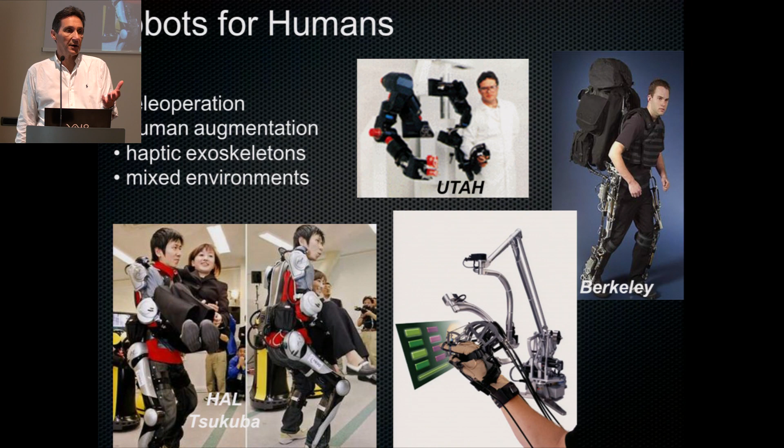So, of course, we are all concerned about doing robots for interaction with humans, that will be applied in cooperative manipulation tasks, domestic applications, domotics, entertainment, assistance, rehabilitation, teleoperation, human augmentation. There are so many applications that require a robot to be in contact with a human. Now, most of us think that this will be the real big market for robotics, the real big driver for robotics in the years to come, and not the old paradigm of industrial robots. So the problem is how to make robots that are soft for interaction, yet strong, simple, but also dexterous, intelligent, and practical.

So the idea that motivates us in the research, the beginning of this community of natural motion, is also linked to studying intelligence, not just mechanics, but also intelligence—a more ambitious program—through its embodiment. That means intelligence is not just brain cells, intelligence is the whole body. So the whole body is the organ of cognition, and we will try to understand how the fact that we have a body and we have constraints due to a body—we have 2 arms and 2 legs, not 3, not 4—but this is a constraint. We have only 5 fingers, not 6. So we have constraints, but those constraints are not just limiting factors of how we are built, our muscle system or our skeleton system. These are not just limitations to our functions. They're indeed defining the way we work. So the intelligence that we have, the way we know it, is the fruit, is the outcome of having this body.

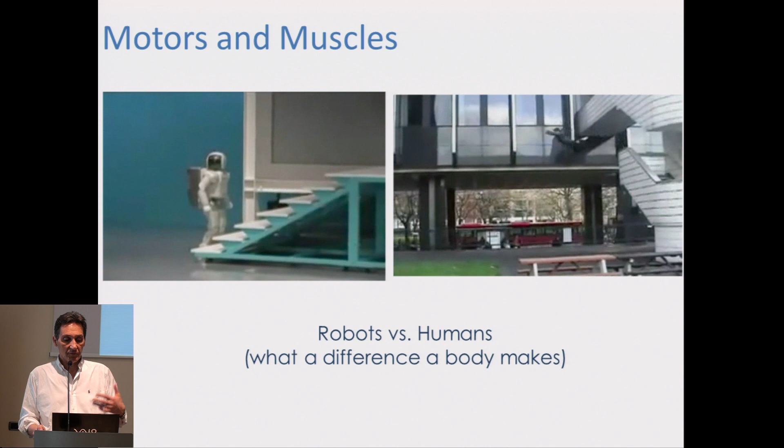Why is that? Well, you've seen this many times, I guess, because the muscles and the body count. What makes a robot very fragile and difficult to use is a weakness that we don't have, because of our muscle system. So what makes a muscle different from a motor?

Motors are accurate and rigid, while motors and gears are brittle. Muscles are resilient — they absorb energy and restitute it, consume little energy, and are capable of smooth, gentle motion, but can also be strong and accurate. So that's the goal.

When you think of machines that interact with humans, the requirements are different. Accuracy might be less demanding, but safety is a must. So the old paradigm that you still learn in most textbooks is: design for accuracy and then try to control for safety.

So you design a machine that is very accurate, therefore it has to be rigid, therefore heavy, and then you try to implement controls, sensors, sensory-based control, to have safety in the interaction with humans — active control to do that.

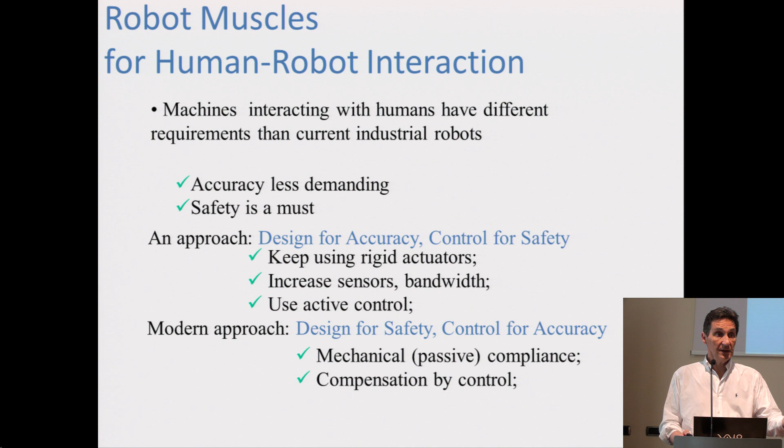But of course, that's not the way we follow. We rather think that we should design for safety and then control for accuracy — compensate flexibility or compliance with control for gaining accuracy again.

You've probably seen this already — I'm not completely sure, since I wasn't here, so I don't know what material has been presented so far. But I'll keep this short. This was early work we did on variable stiffness and soft robots.

Here's an example of how the combination of the link inertia and the rotor inertia, amplified through the square of the gear ratio, can impact a human during motion. Imagine an impact at some velocity, maybe with some compliant covering.

What happens is that safety imposes a limit on the maximum speed, and inertia does too. So you have a curve: if you want to reach some velocity, you have to decrease the inertia, or if you have higher inertia, you have to decrease the speed, in order to have an acceptable level of risk. This is the standard picture.

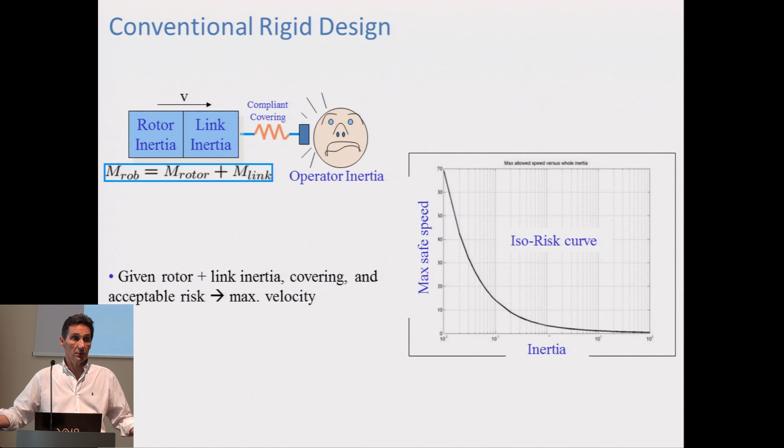This means that if you want to be very safe, you have to reduce the speed — therefore the robot will be very, very slow, which is not acceptable in many applications. So how can you go beyond this limitation? One possibility is to insert compliance between the rotor and the link.

Then you decouple the rotor inertia from the link. This is a big part of the overall inertia because you use the square of the gear ratio. Therefore, it's a big part, and the impact is less if you use this variation.

Now, inserting compliance, fixed compliance, and possibly damping between the motor and the link is sometimes referred to as series elastic actuation. That is a name you probably have seen already.

So if we now try to see what is the minimum time—Giorgio, can you help me with the past part? So the safe brachistochrone has been seen already here? Okay, so we can go quickly through this.

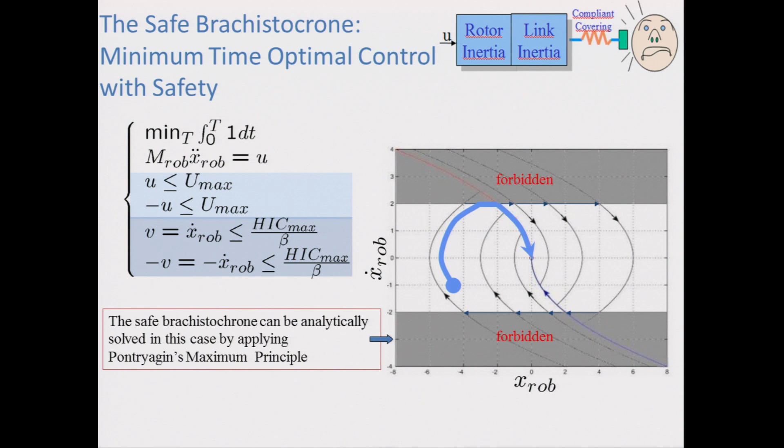So the safe brachistochrone shows that basically you can improve the performance for a given safety limit, but you can do even more if you allow the stiffness to be varied in real time. And therefore you get even higher performance.

So Giorgio, you will be in charge of fast-forwarding me when I'm repeating arguments that they have seen already.

So, motors and muscles. In the human body, each joint is actuated by at least two muscles, and the co-contraction of muscular groups allows for both soft and strong operation of the arms.

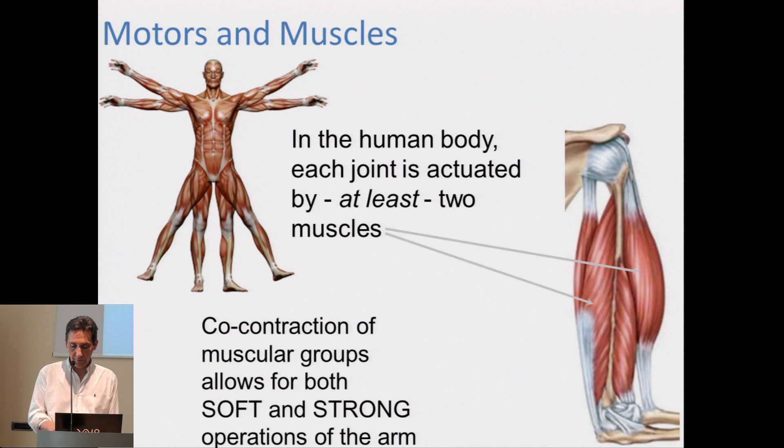Now, what are the motors? I guess you have seen this already: rigid actuation, torque-controlled actuation, series elastic actuators, and then variable stiffness actuators. This is what we are talking about in this school.

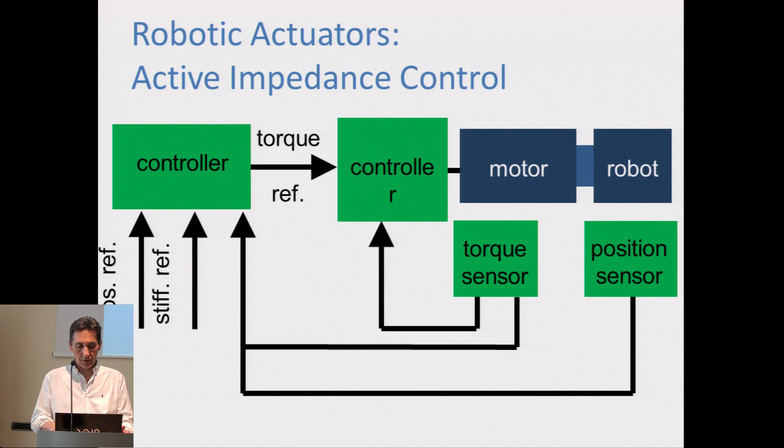I can skip this part because I'm sure that Manolo showed this already. And let me get to...

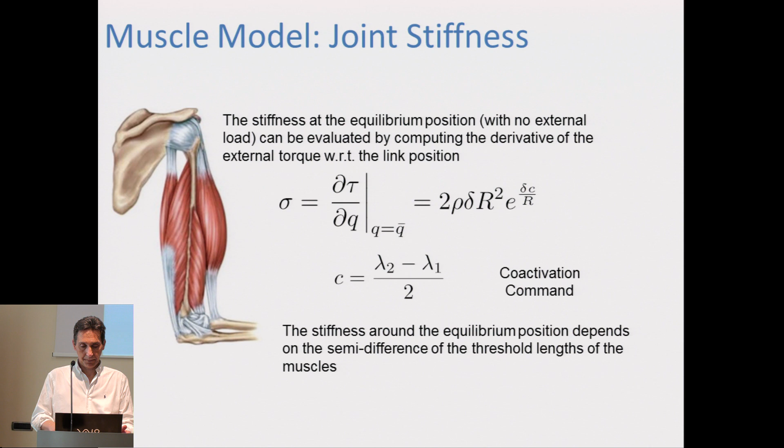So this part of modeling has been seen already, part from Manolo and part from Alessandro. So if there are questions about this part, I'll be happy to go through that again with you.

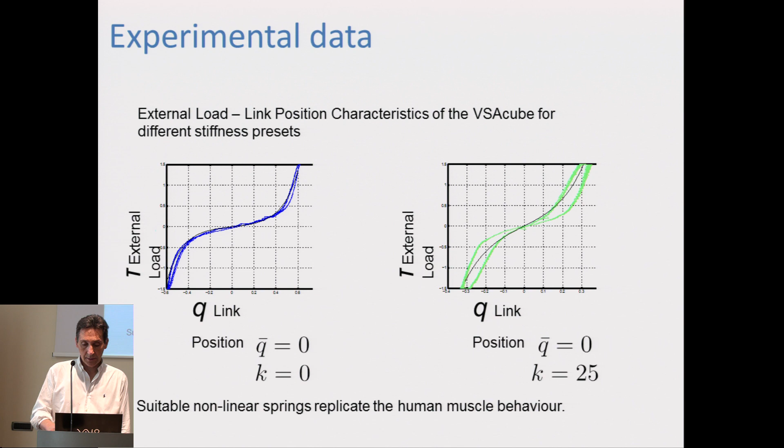So the interesting point here is that with variable stiffness actuators, specifically the cubes that we are using, you can really mimic the behavior of a muscular system, where you replace the R and C commands by the reference position and stiffness reference that you have in the VSA. Even the nonlinear behavior of the muscle can be copied pretty closely by designing these motors.

Okay, so these parts you see. I think I will be... okay, I think Manolo has already given the optimal control part. Yeah, I think I can give you instead. This part, yeah, I think I can.

But what is most important is not even that, because very often the optimal control has to be recomputed in real time, and that is too time demanding. So you will not really do optimal control. What it still gives you is this absolute measure of performance that allows you to compare this hardware with that hardware for an actuator. And that's very important.

Another thing that optimal control gives you is some understanding of how things go. So, for instance, you've seen in the safe brachistochrone that there is this sort of mantra: stiff and slow, fast and soft. That comes from optimal control. You see that the stiffness and velocity switch, the switching function is opposite. So in most optimal trajectories, you want to be soft when you're fast.

Now, the exact switching times have to be solved numerically in most cases. So this might not be possible to do in real time when you really move the robot and have an unknown situation and say, let's compute the safe brachistochrone. It might take too long to do that. But you know that a good motion will almost always combine soft and fast, stiff and slow, and similarly for the other policies. So you distill some lessons out of optimal control, more than just taking the exact trajectory in some cases.

And finally, there is the third great advantage of optimal control, and the reason why in the school we have insisted a little bit on this, is that it represents a language by which you can dialogue between natural and artificial systems. This is what we call bio-aware robotics. When we do robotics, we have to know what happens in the natural system, not always to copy, not always to mimic, not always to be inspired, but to know, and compare, maybe to make a different solution, but to know how it works.

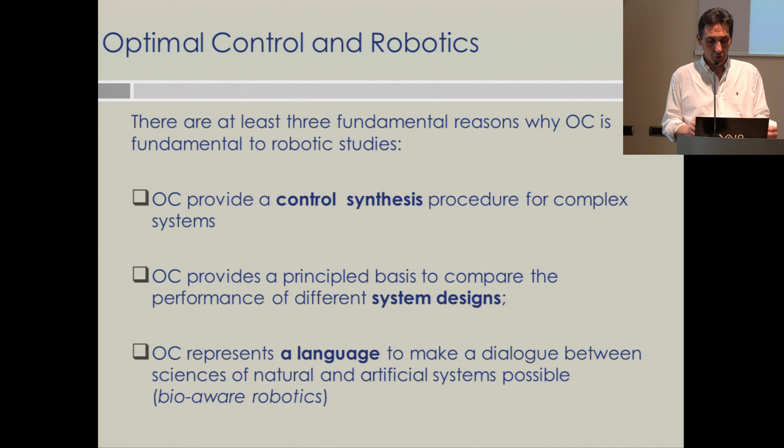Why is this important? Let me show. Because when you want to do an abstraction, the embodied intelligence philosophy means that a large part of the functional capabilities of an organ are in the physical characteristics. So what do I mean? I want to learn something from a human, right? And then I observe how the human does something.

The way a human moves is made by his embodied intelligence, depending on the hardware of the human, the muscles and the skeleton and everything else. So if I simply copy the human motion in a robot, I violate the fundamental tenet of embodied intelligence, because the robot body is different from the human body. If I do exactly the same thing that the human does, I make a big mistake. Humans do the way they do because they have that body, and my robot will never have the same body. It's metal, it can approximate, can look like, we can make efforts to, but it's not the same.

So you shouldn't just work at the level of one-to-one mapping by copying what the human does, but you have to abstract, to understand, go to an upper level, understand what's the philosophy, and then apply the same philosophy to the robot. I think this is the correct approach. You have to abstract from nature, understand, and then bring it back to robots. Optimal control seems exactly the tool that you need to do this very often, because it is an abstraction that does this.

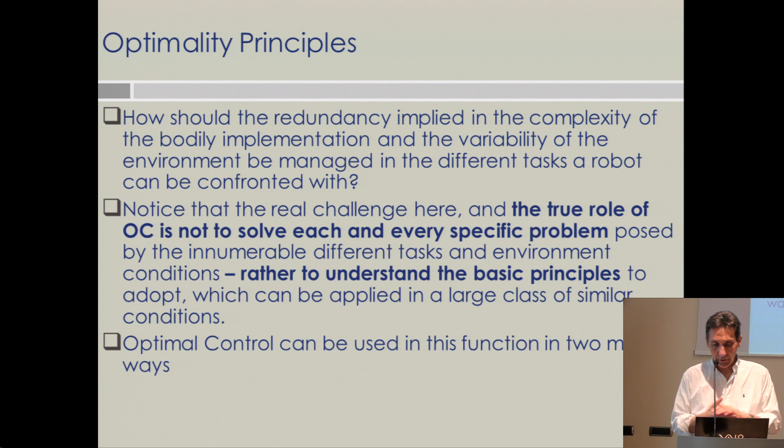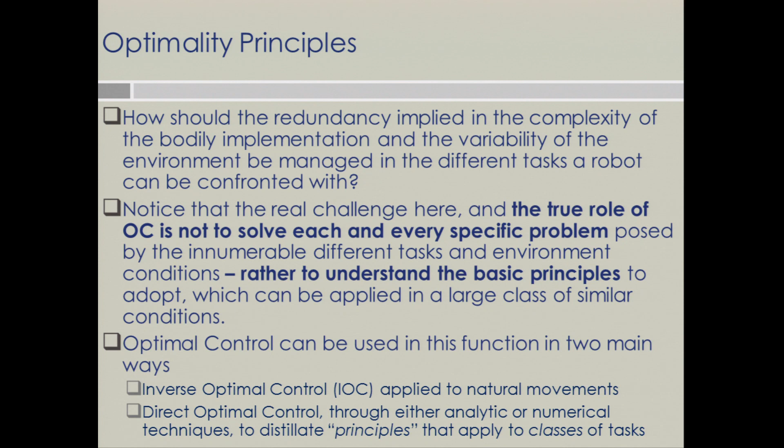Again, optimal control is not, in my opinion, meant to solve each and every specific problem, but to try to understand. There are two main ways to use optimal control: one is inverse optimal control, applied to natural movements, and one is direct optimal control, through either analytical or numerical techniques, to distill principles that apply to classes of tasks.

Let me give you examples of this, some of them from the literature. This is a paper by Mombaur, Laumond, and others in 2010. They show that a stereotype of locomotor trajectories could be interpreted as the result of application of an optimization index.

So what was the experiment? They asked, Alain Berthoz was also involved, they asked the person to move and go through a door in the room, starting from many different positions. Let me mimic it here. So, I'm here, the door is there. I walk, and I go here. Then later on, I might be somewhere else, I might be here, and the door is there, and I do this. So they took all this data.

Notice that when I want to go there, I don't do this - there are infinite paths that I can take, but there is a pattern in what normally humans do. So what Mombaur and others did in this paper is try to understand what the human is doing when it moves in an environment. And of course, they got all this data. The point now is how you understand this data.

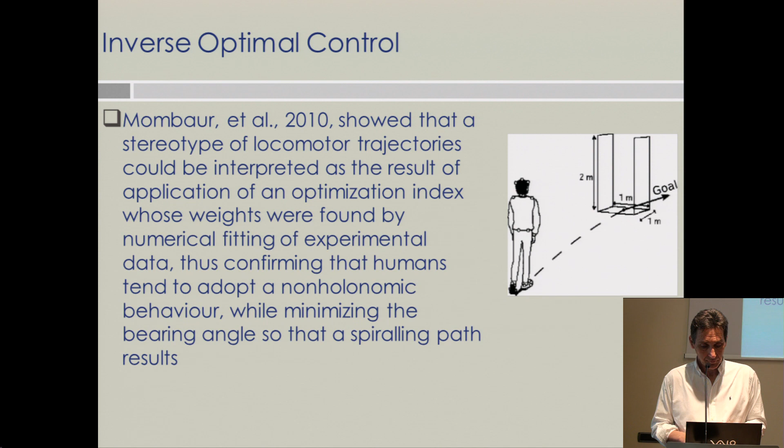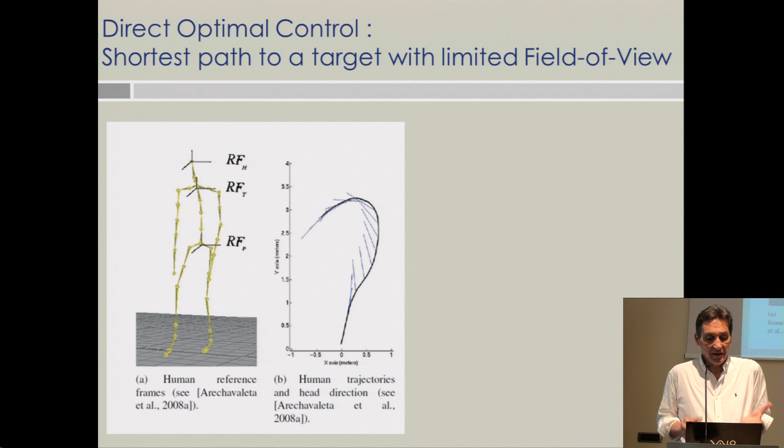And this is an example of direct optimal control. From the inverse optimal control that I explained before, we are now moving to direct optimal control. Now we are asking: I have a model, I have this vehicle that can move in the plane, has some non-holonomic constraints, and has limits. What is the best path to go, shortest or fastest, without missing the object? Direct optimal control means you write the performance index, you have the dynamics, you do your math. Basically you apply Pontryagin, you do the analysis, you do the synthesis, or if the problem is too hard, you do numerical control. And you find solutions.

Here is one solution. In this case, we were pretty lucky because we could find the analytical solution to this optimal path. It's interesting to see that the optimal path is made of concatenations of arcs, optimal arcs or extremals, that are either straight lines or arcs of a logarithmic spiral.

So the optimal paths are either straight, if you have the object in front of you, you just go, or if it is not directly there, then what you do is keep the target at the extreme of your field of view and move towards the target. If you do this, the trajectory that results from this extremal is a logarithmic spiral arc. So you see those spiral arcs here that take the vehicle in shortest time to the goal. Here is the goal.

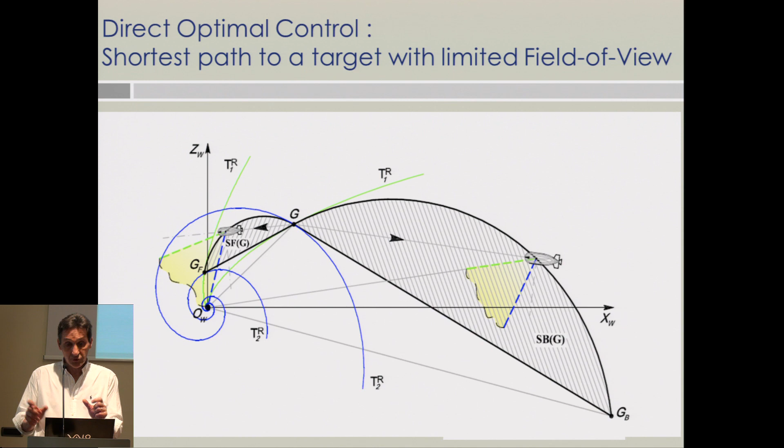Also, a raptor has to fly, and when you fly, you cannot move sideways. You have to turn or go straight by flying. So you have non-holonomic constraints. And raptors have a limited field of view—indeed, they have a pretty narrow field of view. Of course they could turn their head, but when they are catching prey, they won't turn the head because the air drag would be too high. So they want to keep the most aerodynamic configuration, so the head will be fixed.

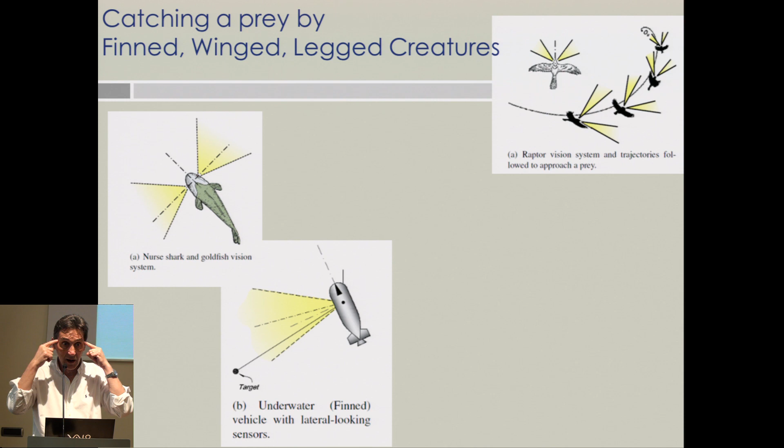So they have a very narrow field of view, and they have to keep the prey in view while they fly. They cannot take the prey in front of them because they don't see in front of them, right, because their eyes are on the side. So raptors have to fly looking at the prey that is on their side.

Even butterflies or moths fly according to the same principle when they go around a light bulb. It was very interesting that after having solved this direct optimal control problem with logarithmic spirals, you go into the natural literature and find that sharks, falcons, and moths all fly along logarithmic spirals. These are natural data, biometric data from all those species, so they all do the same thing. This is what I mean by saying that optimal control is an abstraction that can help you take real inspiration from nature.

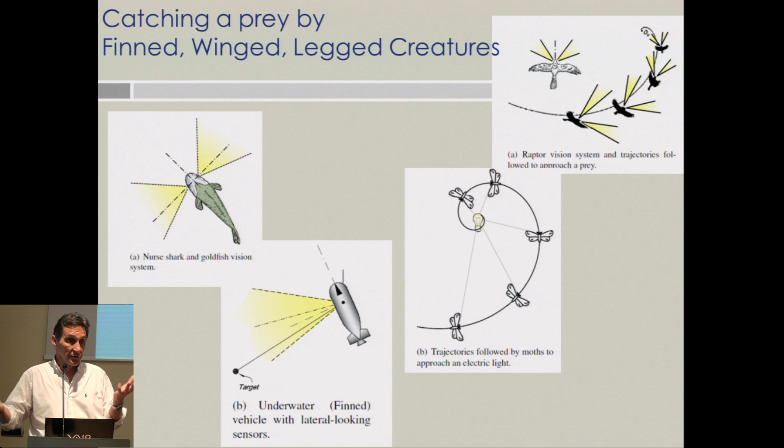Okay, with this, I think I will skip some parts because you have seen this already, on the actual application of optimal control to variable stiffness motors. So I have given the introduction to the optimal control part after the optimal control part. I hope you still... Oops, big mistake.

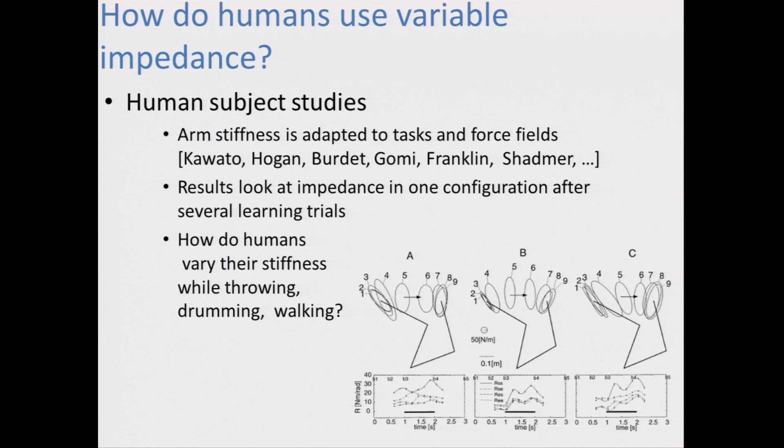Okay, so we say we have variable impedance. How do we use it? One possibility is optimal control, enough with that. Another possibility: how do humans use variable impedance? Try to understand what they do and do it again. So one obvious thing to do, first of all, is to try and understand how humans do that by doing human studies.

We know that arm stiffness is adapted to tasks and force fields. There is a lot of work by Neville Hogan, Mitsuo Kawato, and then Etienne Burdet, Gomi, Franklin, Shadmehr, many others who looked at the impedance of the arm in different motions.

As I said before, it's not easy to measure stiffness. It is possible during a repetitive task, like what Etienne Burdet did. But if you wanted to know what the stiffness is while I throw an object, how does the stiffness change while I throw the object? I don't think anybody is able today of giving you an answer. We don't really know, because it's too fast to be measured. So this is not easy, we don't really know how to do that well enough yet.

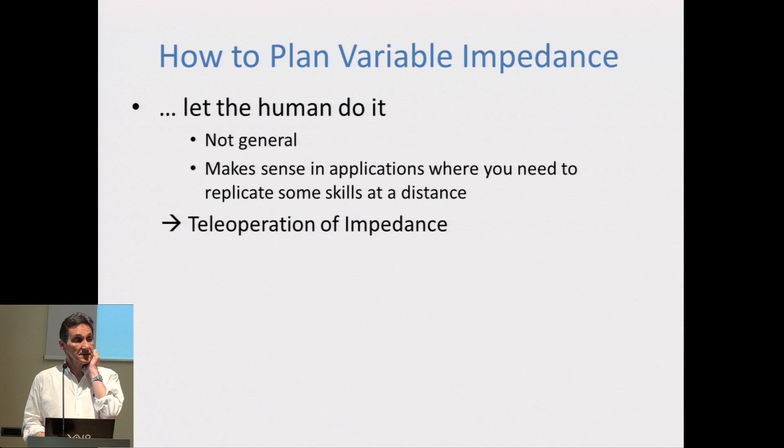So you know what teleoperation is about. Teleoperation consists of measuring motor control parameters in a human and replicating them in robots. The typical application is that I have a master and I have a slave. My left arm is my slave, so I move the master and the slave follows. Teleoperation is very old, older than robotics. The very first mechanical arms designed in the 50s or even the 40s were arms for teleoperation, much before robots, especially for nuclear waste disposal or nuclear manipulation.

Remote control of position is rather easy, you just measure one position and you copy it in the controller. And here is an example. But position control is not enough when the slave interacts with an environment. You move the master and the slave, and then you want to do something on the environment. I mean, as long as the slave is free, there's no problem.

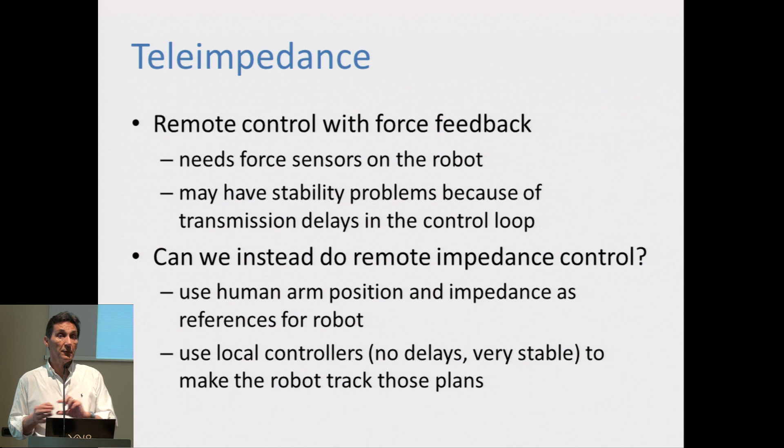When the human arm is soft, the robot should be soft. And when the human arm is stiff, the robot should be stiff. And when I'm stiff in one direction and soft in the other direction, I want the robot to be stiff in that direction and soft in the other. By doing this, I hope I can get away without controlling the force, just sending a reference, pure feed-forward control of impedance.

So the idea is that the operator moves the hand and adapts his impedance to solve the task based on visual information from the scene. So we have to sense the position and impedance on the master, control them on the slave, and then ask, is this useful or not?

How do we measure impedance? One way of measuring impedance, probably the simplest and most accurate, is electromyography. Electromyographic signals correspond to muscle activation and are strongly correlated with muscle force. It's very easy to implement, not invasive, relatively cheap, much cheaper than exoskeletons. It's a common signal of choice for prosthesis, for instance.

The signals are not perfect, they're noisy, they're not too stable, so you need some good processing. But there is quite some work on measuring joint torque and stiffness estimation from EMG. You can do that using a model of the arm, which is not trivial, because going from the forces measured at the muscles to the torques at the joint is a long way — you have joints that are not really kinematic joints, they're all rolling joints, and tendons that don't have a fixed radius but change in motion. So the model is complicated.

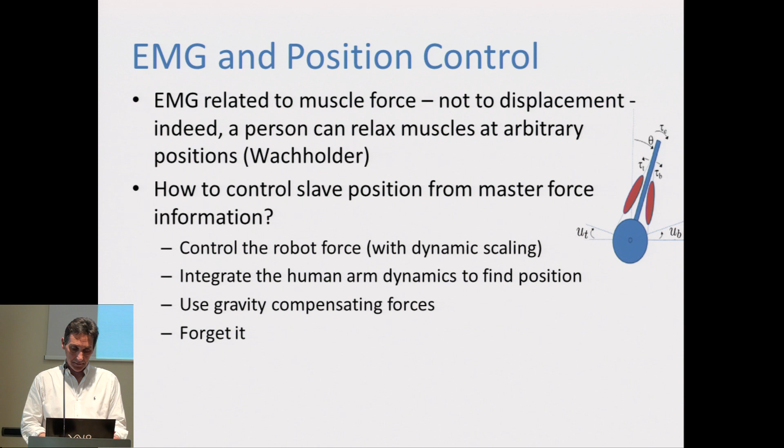So to measure the position from the master to the robot, I don't think it's a very good idea to use EMG, because there are many other means of measuring position, such as optical or inertial measurement units. So the idea is to control the robot force. Well, this is the idea that I don't like. You could control the robot force, integrate the human arm dynamics to find position, using gravity compensating forces, and then forget it. This is too long away. Measuring the force to find a position, it never worked with us.

But then, as I said, just measure the position. There are very cheap inertial measurement units or more accurate optical measurement units. So we measure the master directly, and we control the position through those sensors with higher priority, and then we control impedance in the null space of position control inputs. So basically, we now control the position of the slave and control the impedance of the slave without altering the position command.

So we can vary the slave control in the null space. That means all the controls that will not change the position. We use those controls to change the stiffness.

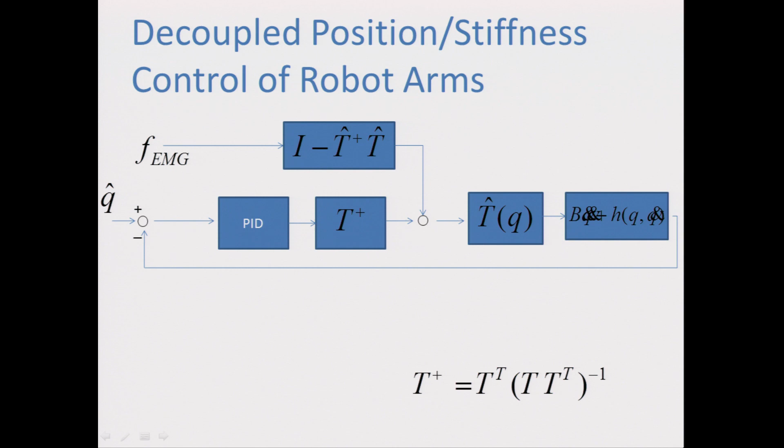So this is the scheme that we are using. Again, T is the map from EMG to torques. What we do is take a measurement from the EMG directly, and project them in the null space of this map T. That means you get torques that will not affect the position. And here you have the position control loop that gives you the torques needed to get some positions. You add something that filters out the component for actuation. So the torques in the arm are divided into subspaces: one controls the accelerations and positions, and one doesn't change that, only changes the stiffness because of the co-contraction.

Here is the setup. You can put EMGs on the muscles, measure them, get the position commands from markers, and get the co-contraction and stiffness from here. Put them into a controller, and then use them.

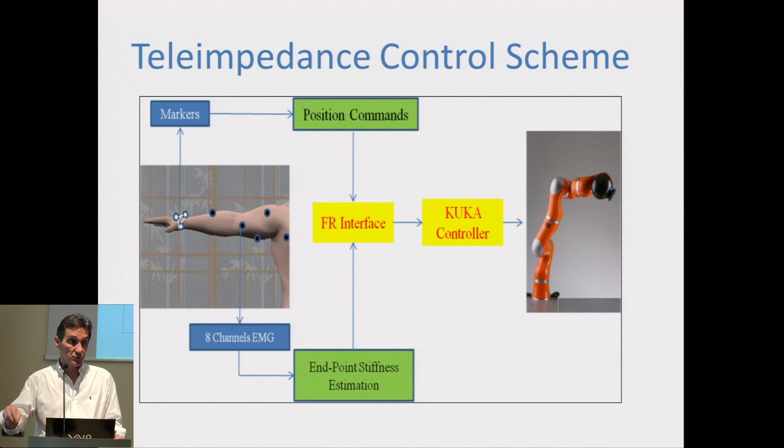First of all, we use that in a KUKA arm. In the KUKA arm, we are controlling the impedance through force control, through the classical impedance control implemented in the KUKA. But you can do the same, and we did, with variable stiffness actuators, where you have the control of the stiffness directly at the physical level.

Here are some experiments. On the right you see the arm of Arash Ajoudani doing this very simple task, moving the arm. You get the position from these sensors on the wrist, and the robot is following that. At the beginning, it moves with very little stiffness, so the robot tracks with very little gain on that position. At a certain point at the end, the person stiffens up the muscle, the arm. Then the robot gets the same impedance, so its position gains are basically increased, and it will press more.

So observe this again. At the beginning, he's relaxed, he's moving. You see the robot has an environment like a sponge, enough to keep him away from the reference. But when he stiffens up, then the robot also stiffens up and gets over the obstacle. Is that clear? So it's a very, very simple idea, actually. Embarrassingly simple, but effective. Let me see if I have the videos here.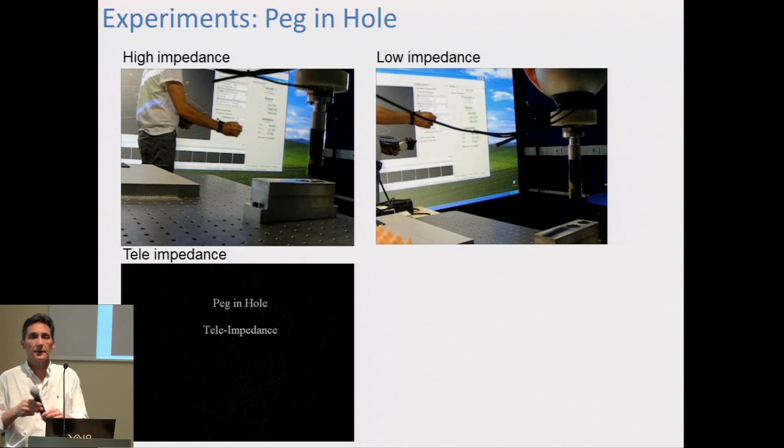Yeah, so here is a classical peg-in-hole example. Roboticists have always been obsessed with this peg-in-hole thing, I don't really know why. So you have a hole and a peg. The hole is tight, and you have to put the peg into the hole. If you make a little error in alignment, you will have very high forces. It will jam in the hole and will not go down. If you are in the hole, you have to press with some definite force in the vertical direction, but you have to be careful not to go in the wrong direction with torques or displacements.

So basically, you have to be compliant in this direction and strong and stiff in the vertical direction. So there are directions where you want to be stiff and directions where you want to be soft.

So what happens if you do teleoperation without teleimpedance, and you have the arm controlled with high impedance? As you see here, Arash is moving the arm, getting to the point where the robot touches, and then you have this interaction. This interaction has very high forces that you could see from the screen if it were not so small.

So you have high interaction forces. Here is with low impedance. What happens with low impedance is that, to all effects, you cannot get into the hole. If you have low impedance, you can find the hole because you adapt much better, but then you cannot press inside.

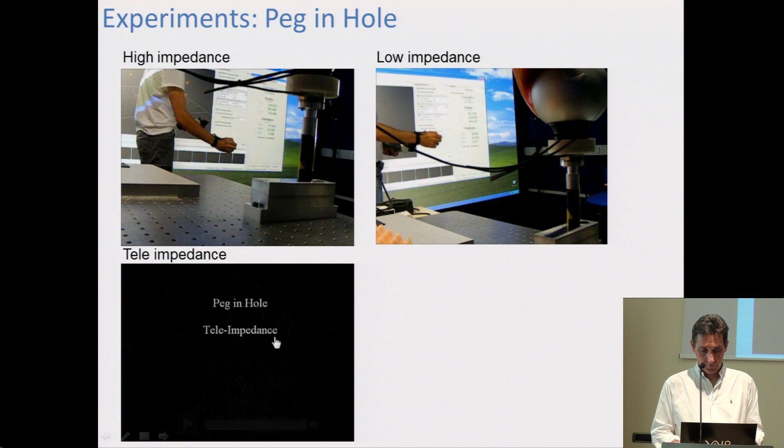And finally, here is the teleimpedance. I hope you can see this. So here, the human is moving around. He's relaxed now. He touches the environment. He's very relaxed, so forces are very low. You're not controlling the force, but you are controlling the impedance, so the arm is very soft. And then when you get to the hole, you force it down. So you squeeze, you co-contract your muscles, and you go down.

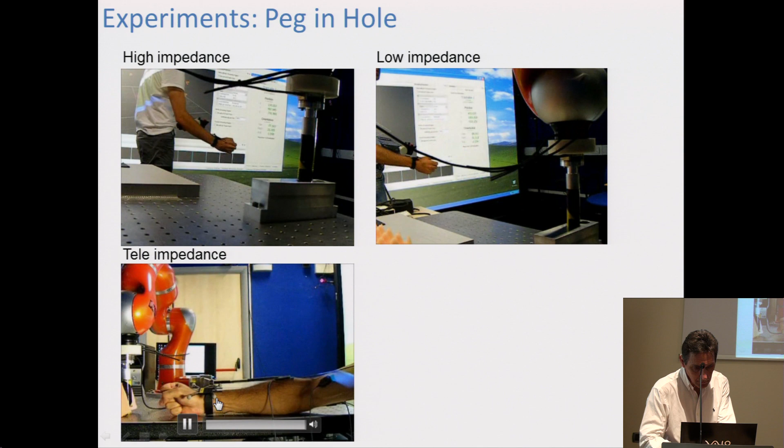When you are inside, as you could see here, let me show the final part of this again. Was this the peg-in-hole? Yeah. In the final part, you will see that it goes, then it co-contracts to press the peg inside, and then

he relaxes. And when he relaxes, he moves the arm up, but the robot will not come because there is a high force. The hole is very tight. So to get the peg out of the hole, the operator has to contract again.

What is notable is that, of course, this goes through a calibration of the EMGs that, as we said before, you need to know this T matrix, this mapping, and you have to calibrate that experimentally. Turns out to be pretty robust. So I used it with the same calibration data as Arash.

Now, between Arash's arm and my arm, there is a big difference. He plays tennis almost professionally. I'm absolutely not that good. So he has twice the arm that I have. And still it worked with the same data.

And what was remarkable when I tried it is that it's really convincing. You feel like you feel the force. And when you extract it, it seems to you that you are really feeling the effect of the disengagement from the hole.

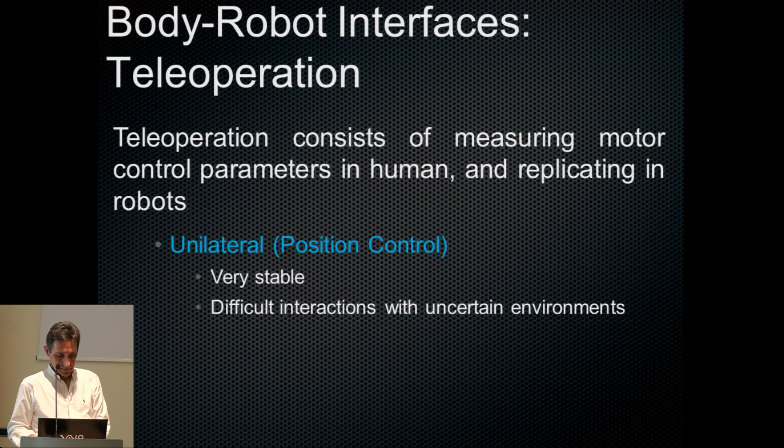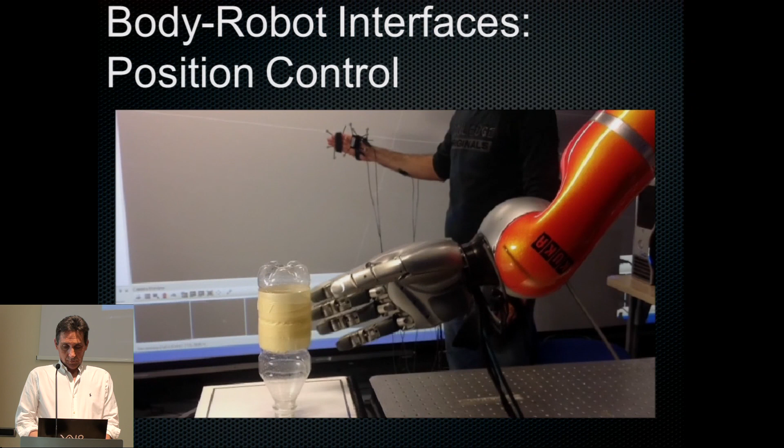Okay, I think we can go quickly through this because we have seen this already. And these are some details on how you model the stiffness and how you practically estimate those mappings, but I think these are a little bit too much detail. So next part.

So this concludes the first part of the talk, and then I move to the second part. And the next part is on hands, again using an embodied intelligence approach to taming the complexity of hands. Again, a big group worked on this.

Yes? Before we start with the next part. So, okay, yes.

For my understanding, the most complicated part is that mapping, so finding matrix T. And how robust is that matrix? Because you said that for different subjects, I suppose it's very different. From the very beginning, you have to measure EMG, which is very noisy, but also you have to calculate stiffness. And even for the same subject, when your skin gets wet, I believe that these measurements are very different.

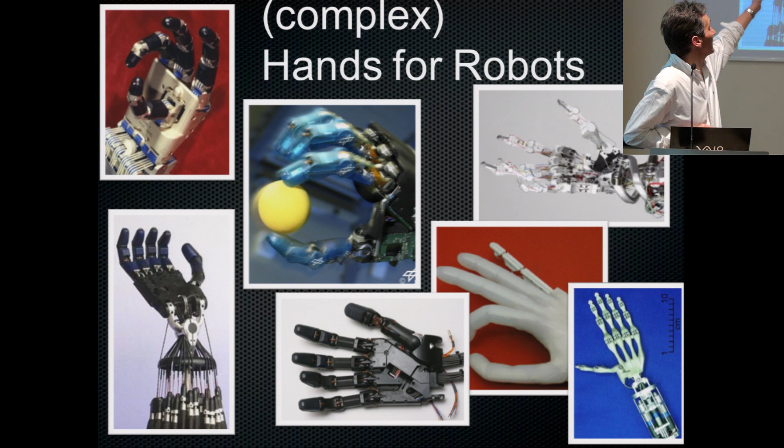Hands for robots are something very interesting to many people, and to myself, since my undergrad thesis work. These are beautiful hands that have been around, some from the 70s, some very recent. There are many beautiful engineering pieces. It's a long history of hands.

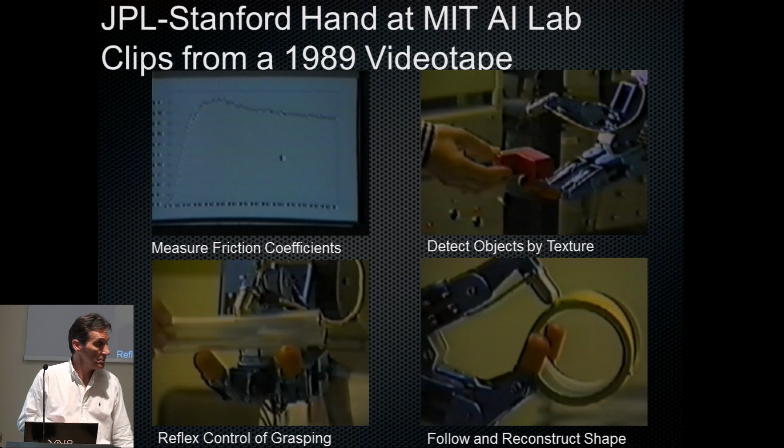This clip is from 1989, showing the JPL Stanford hand, also called the Salisbury hand. With this hand and a very simple intrinsic tactile sensor on the fingertip, a force-torque based sensor, you could do things like measuring the friction coefficient on an object, sliding the fingertip, detecting different objects by texture simply by sliding the finger, having a reflex control of grasping to grasp an object with minimum necessary force, and when the object tends to slip, increasing the force just to oppose the slippage, or following and reconstructing the shape with tactile exploration. These are things that are still interesting now, I think, and they were done back in '89.

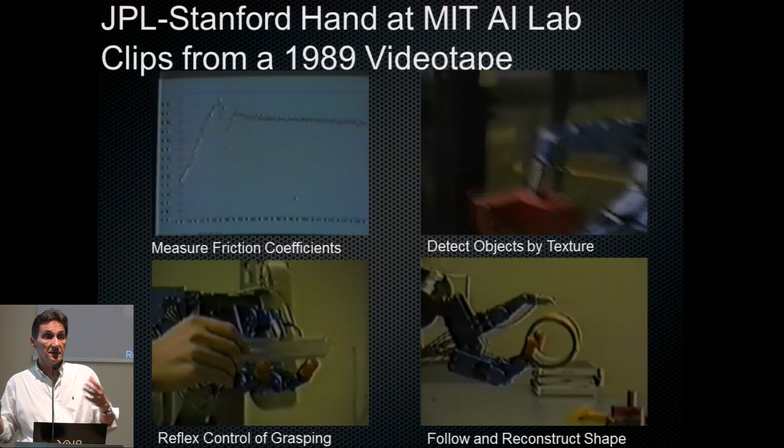So why should we bother about robot hands? Aren't they a solved problem? There's a famous quote by Gill Pratt, the DARPA main person, who said grasping is solved. That attracted the rage of the whole community, because you cannot say a problem is solved until people stop working on it. But he was right.

In some sense he was right, because hands have been around doing things for a long time. So what's the problem with this hand? If you look at the back of it, there are at least a couple of problems. The hand is nice and almost the same size as a human, roughly, but it has a big motor box, connected to the hand by Bowden cables, sheaths and tendons, which were a source of friction and, most importantly, a source of very frequent breaks, especially at night, especially when you needed them for a demo the next day.

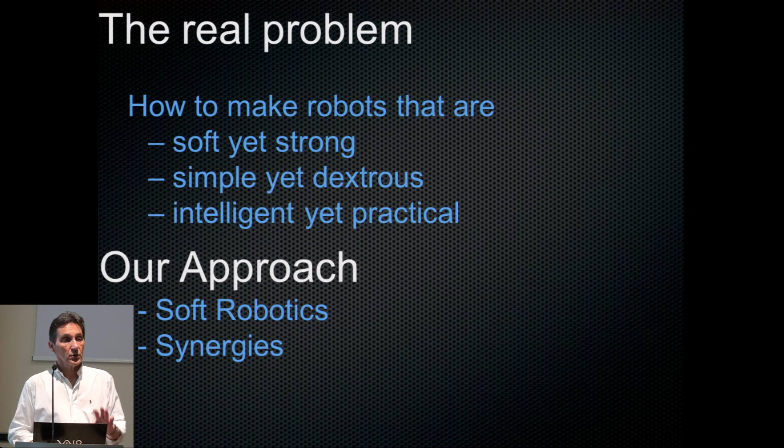So this is terrible. The real problem with hands is to make robots that are soft yet strong, simple and dexterous, intelligent but also practical. The approach we followed merges two ideas: one is soft robotics, which is what you've been seeing here, and the other is synergies, which I referred to quickly at the beginning. So I'll tell you a little more about synergies now, part of this natural machine motion idea.

The human hand is itself a very complex system. As you know, there are veins, arteries, bones, ligaments, muscles, and the sheer numbers are striking: 29 major joints, 123 ligaments, 34 muscles at least to move the hand, 48 nerves, and an incredible number of tactile receptors, thousands, in the skin of the hand. How can the brain cope with that? How can the brain use the hand while thinking, while talking, while doing other things?

There is some evidence in neuroscience for what are called sensory motor synergies and constraints. There's a long history of people observing that the brain doesn't really know about muscles, as Bernstein put it. When the brain wants to do something, it doesn't talk to a muscle directly. It talks to a higher level of organization called a synergy.

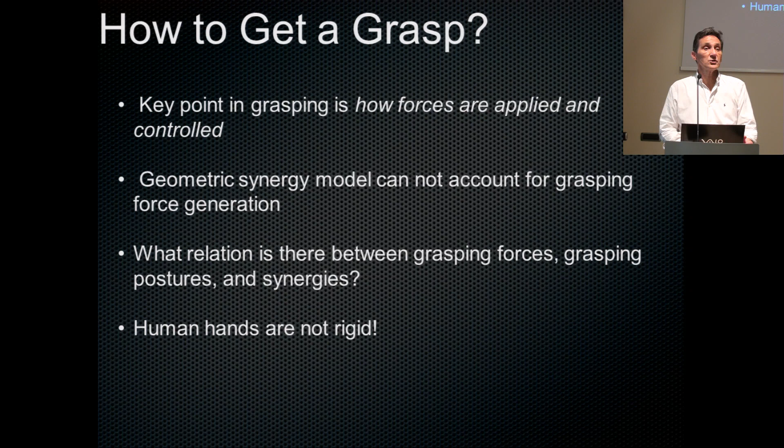The solution is that humans are not rigid, and so shouldn't be machines. If you introduce a model of compliance in the human, you have compliance due to contact compliance, and some compliance due to the tendon system, the muscle system, the capsule. So you have compliance in the system, represented here through this formula.

Basically, you have some compliance at the fingertip, due in part to the object compliance itself, due in part to the fingertip compliance of your arm. Then you have some compliance at the joints or at the motors. So joint compliance is CQ, structural compliance at the contact is CS, CQ gets transformed through the Jacobian of the finger, you sum the compliances, then you invert, and you have the stiffness matrix of the grasp.

If you introduce compliance, then you can talk about forces. If you don't have compliance, you will have a hyperstatic system and a force-indeterminate system, and you cannot really know what is going on with forces. So since humans are not rigid, we introduce a model of compliance.

And then you can talk about the internal force, the control of internal forces. Internal forces, if you haven't been working in grasping hands, maybe you don't know, but internal forces are the crucial part of hand control and grasp control. Internal forces are those forces that a hand can apply on an object without moving the object. They're also called squeezing forces.

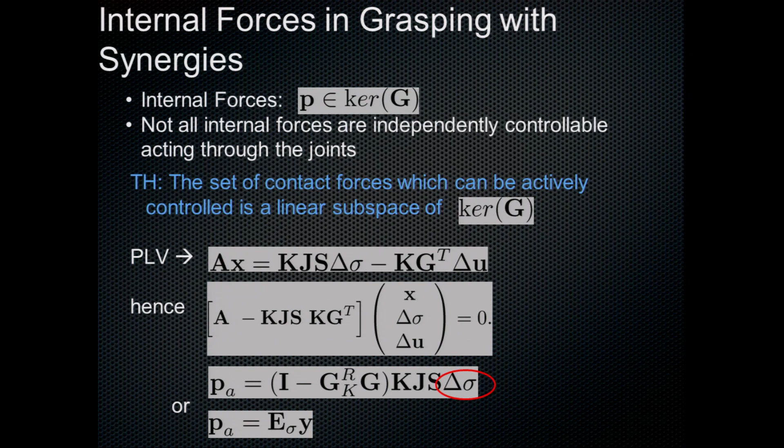This is a projector in the null space of G, the grasp matrix. The grasp matrix is the application that sends fingertip forces into object wrenches, and this projects in the null space according to the K-weighted norm. So it's simply the pseudo-inverse weighted in K times G, projected there, I minus that. So you can find this formula, and you can find a reasonable model of what you can control.

What does it mean, basically? It means what we call the soft synergy paradigm, which is really the merging of the ideas of soft robotics and synergies from neuroscience. So the idea is that the posture, the geometric synergy model, the principal component model, does not really

dictate the shape of the hand directly. But it does rule an internal reference representation of the hand configuration. And then the higher level control of the hand commands this internal representation within the synergy manifold.

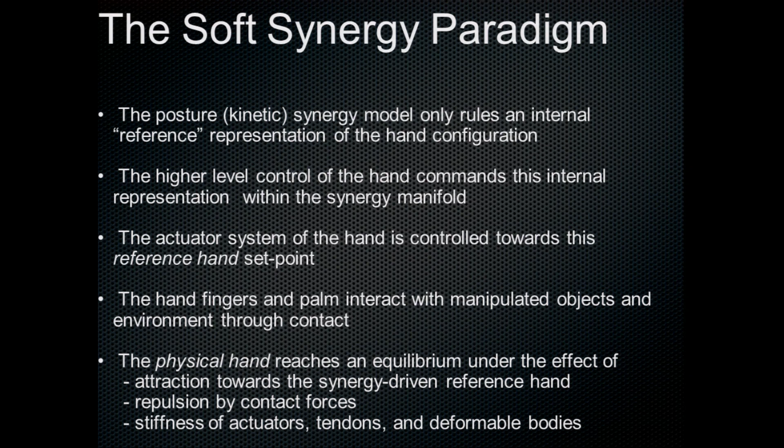The actuator system, the muscles, are controlled towards this reference hand. And the hand fingers and palm interact with an object, with the environment, through contact. And then the physical hand, the real hand, reaches an equilibrium between the attractor, which is this virtual hand that has the shape of the synergies, and the repulsion of the object forces.

Okay, is that clear? I think I can show it. Again, the real compliant hand below is attracted by the internal reference but repelled by contact forces and reaches an equilibrium configuration. I think this video here explains it better.

So you see the virtual hand is the wireframe hand, shaped according to the principal components, one principal component only. That shape is not compatible with the object, so it will go inside somehow. The real hand is attracted toward this mesh and is repelled by the object. As a consequence, you generate forces.

Now, if you want to apply more force, what do you do? You move the reference inside, more inside, so it will squeeze more. The real hand will be more strongly attracted. Or

you can keep the reference still, but you can change the stiffness. And therefore, you will have a stiffer grasp with the same delta position, so you will have a higher force with a stiffer grasp. So you have this possibility.

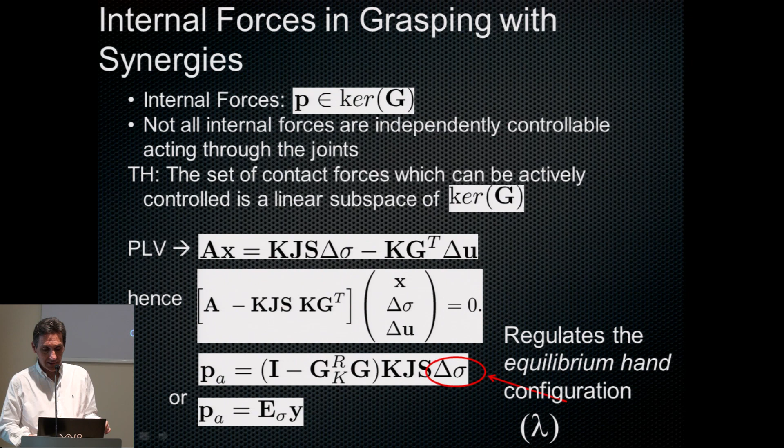It's called the lambda model by Feldman, the lambda muscle model. And I mean, this model fits perfectly, almost perfectly, because this delta sigma, they would call lambda. It's really the reference of the hand or the muscle system. They usually do that for the arm, not for the hand. The reference towards which you are attracted, and this is the stiffness that controls the force.

Okay, from theory to practice, we started doing work on implementation. And again, you have to do things properly if you want to do a hand that is useful. So again, looking at how human fingers are built, Manuel, Giorgio, and others started designing a new hand based on completely new principles.

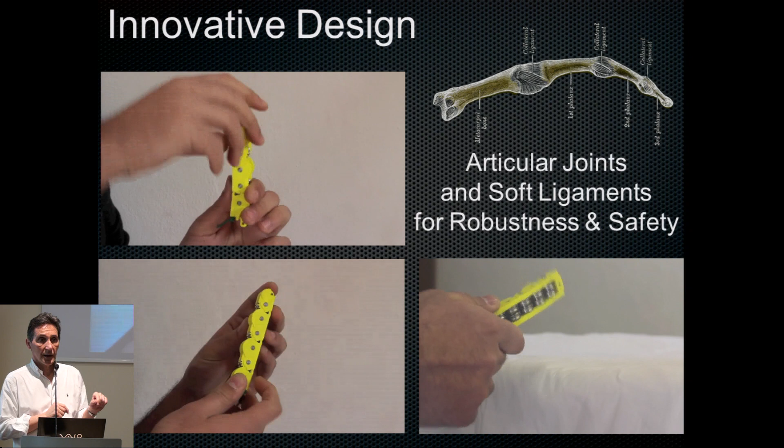For instance, here is the finger. The finger has no bearings, has no traditional joints, traditional kinematic pairs. Rather, it has phalanges that roll on top of each other, as you can see. And they are kept together by elastic ligaments that you can stretch.

And if you can stretch them and let go, they will go back in the right position, as you can see in these videos. And what is interesting is that you can really bang it on a table, and it doesn't break.

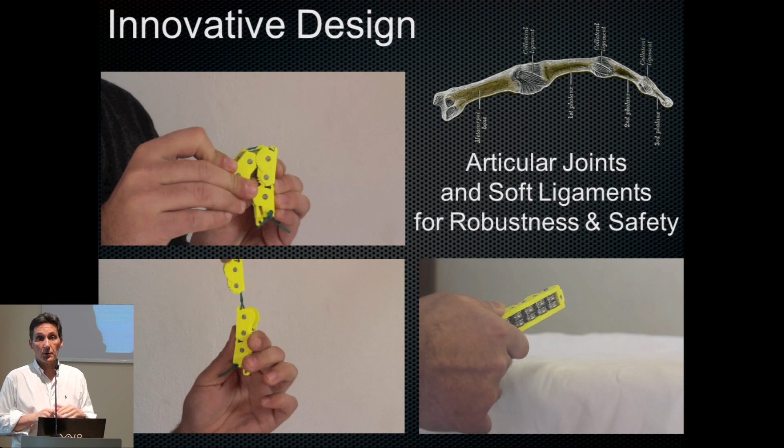This was completely different from the old-style hands I was showing before. They are very fragile. Here is the PISA IIT soft hand, which is part of the NMMI initiative.

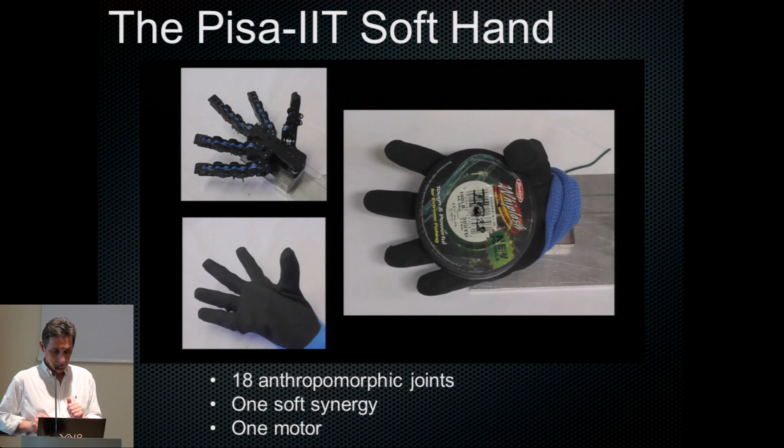It's a completely open source design. You can print it out. It's intended to be simple to use, low cost, effective hopefully, very robust, and very low cost, as I already said. That was the main goal.

So here is the hand that uses 18 anthropomorphic joints but can adapt to many different objects. You can see this different shape of the hand with different objects. It only uses one soft synergy, only one motor. If the hand closes without any object, it follows the first synergy, the first principal component observed in humans. But if an object is encountered, it adapts to the object with this idea of a soft robot.

There's an interesting point I won't have time to deal with fully: in this case, the hand is not just soft, it's also adaptive. There is one way of implementing adaptive softness that's different from just having elasticity, and that is under-actuation. The hand uses under-actuation, and we'll be happy to talk about this.

But let me show the hand first, grasping round and cubic objects of different shapes. The hand is controlled in these robot experiments with a very simple command: open, close.

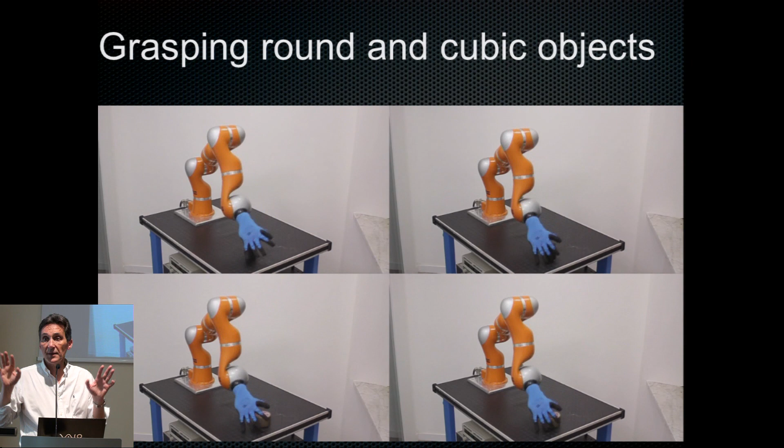Or in some cases with a proportional control, close more, close less. There's no basic intelligence in this task, you just go there and grab. And as you can see, the hand shapes differently in different cases.

I like this part. If you observe, the same hand, the same control structure, the same object, but two different poses - you look and the hand takes two different shapes. This is just passive, it's built in. So the hand shapes differently: in one case it has a top grasp, in the second case it has a pinch grasp on the handle. It's really something that is not coded.

All the intelligence that you would think is there, because you see it adapts to the task, is built in. This is due to the fact that we're replicating the first synergy and doing it softly. So there are two different grasps depending on the affordance of the object, and I think this is what we call embodied intelligence. You can grasp handles.

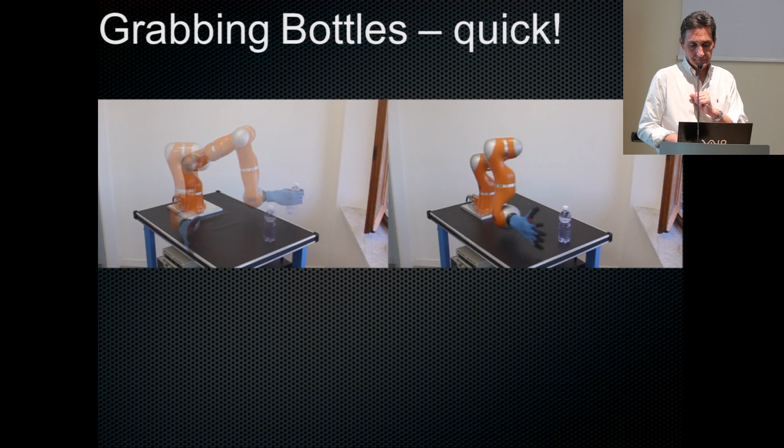It can, of course, grasp bottles with different shapes, and you can also do quick things, rather quick. That's not so impressive to you, but to me, having worked on hands for many years, that has always been something I wanted to do: just grab an object. It was the first time I was very happy, because it's safe and robust by design, so you can really mistreat the hand.

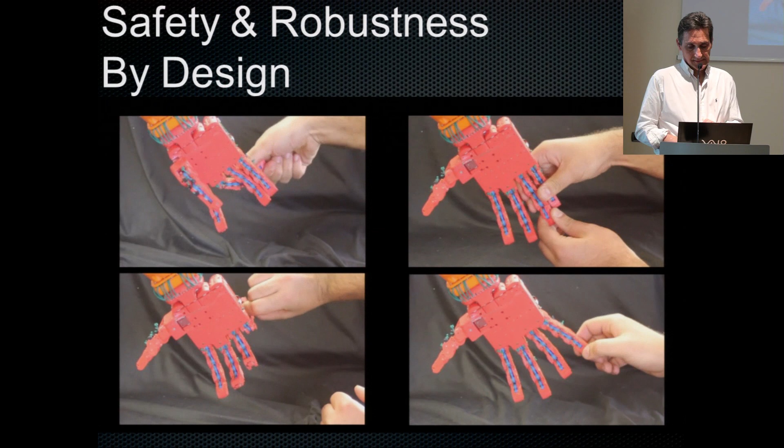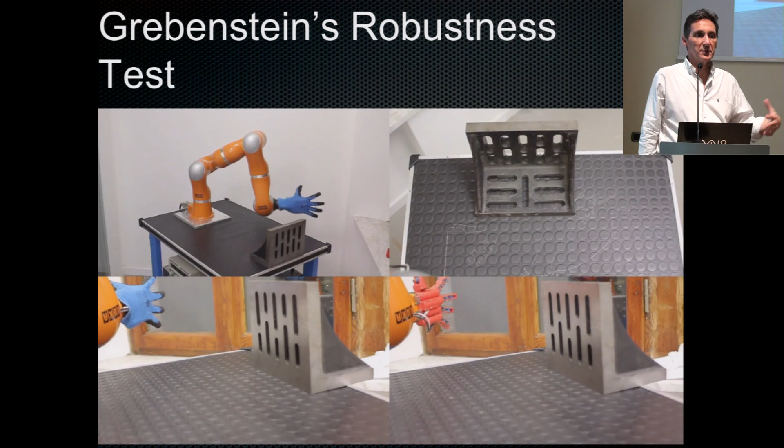Markus Grebenstein is an engineer at DLR in Germany, and he says a hand has to withstand this in order to be of any use. If you can't do this with a hand, it doesn't serve any purpose. So we were very happy to pass Grebenstein's test with the hand - you can really throw it around.

And then next thing was, okay, we can do something with the hand - let's try and see what humans can do with it. So we developed a very simple human interface at the beginning so a human could wear the hand and control it. Basically what you do with this device is open and close the hand. You have a little lever within this hood, and the lever closes and opens the hand, and then you can wear the hand and use it.

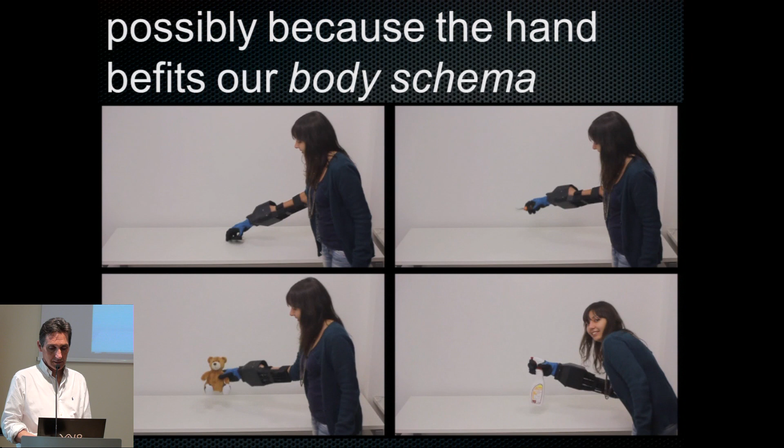We have an exemplar there, so after the talk, today or tomorrow, you can play around with it. You see here Cristina Piazza, who is one of the authors - that was wonderful, she was an undergrad when she did this work. She can do nice things with the hand, actually much nicer than what the robot could do.

We thought it could do something useful, but it actually can do much more than what we originally thought. Then we started observing what the kids do. The kids exploit softness, exploit compliance to shape the hand so that it will be in the right shape to do something.

After looking at the kids, I started looking at my own hand. If I grab this object, very often I do this: I use the environment and the object to shape my hand. I don't think so much about the position of the fingertip, but I do think about the interaction with the environment. Now, if you were doing grasping, these are more examples.

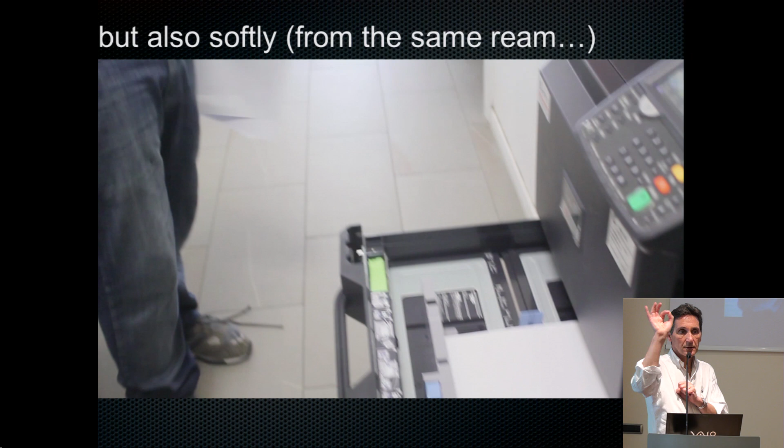Here is one more: you can grab a ream of paper. It's heavy, but you can grasp it, and it can be strong. It can also be soft and take a single sheet of paper out of that. Again, you see the human using the hand in an intelligent way.

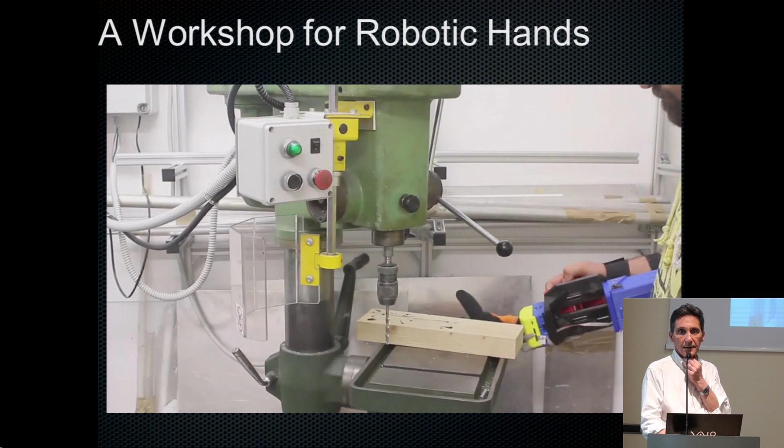Here is Manuel doing some workshop work. I will cut this short, but this is interesting. It's not trivial to do.

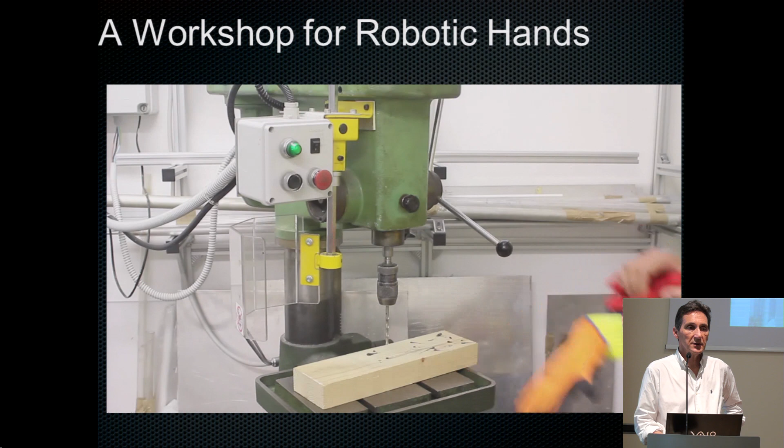The first question I used to get with this hand was, okay, yes, you can do this, but can you press buttons? And the answer is yes, you can press buttons, although you don't have all the... Now, next is, can you play piano? No, we can't. But many other things you can do.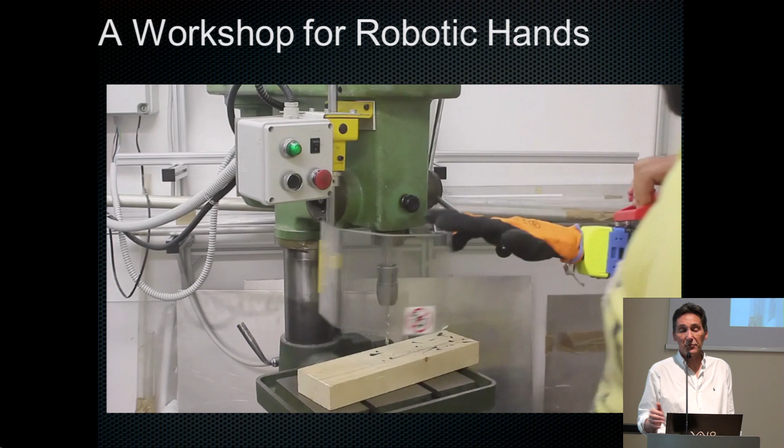Mainly because the hand is compliant, the hand is soft, and we know how to use it. We do it, look at this. There is some dexterity you can have. Look, it opens deftly, opens the little notch, and then gropes, takes the object.

Okay, so you will have time to try the hand if you want later on. Here are a few more things, like flicking, catching and throwing with the hand. Here is Manuel.

You have to give me, I don't have the real videos here, the latest one. But this is enough impressive. This is Manuel. Manuel is the only one who is allowed to do this with the hand because he is the father of the hand, so he can really mistreat it.

So he's punching. This is 15 millimeters thick wood. If you do that with your own hand... well, forget my own hand. If Manuel, who is this big guy, does it with his own hand, it doesn't work, he gets hurt. And the hand can do it.

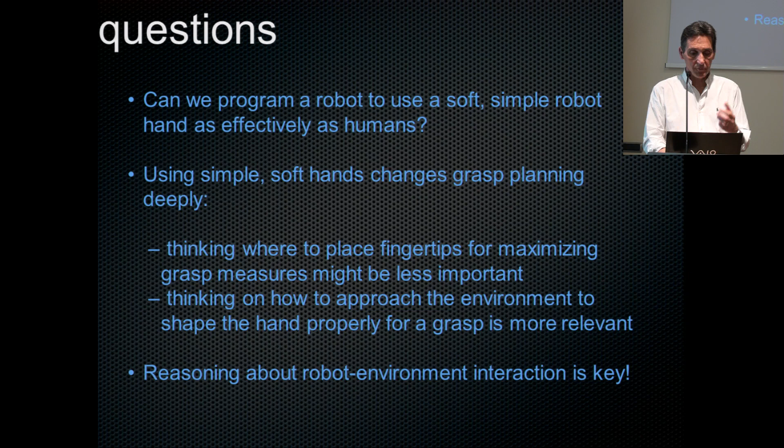So if you give me 5 minutes, I will go very quickly towards prosthetic application using teleimpedance control on the hand. It's basically the same idea. We can control now the stiffness of the hand and see what happens. So let me skip all the details here.

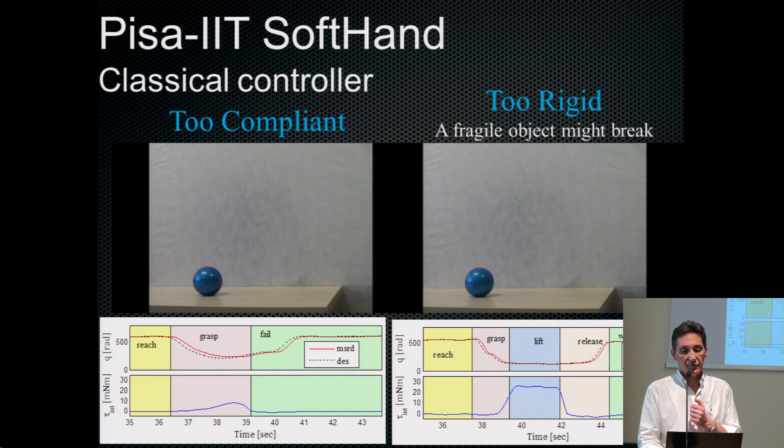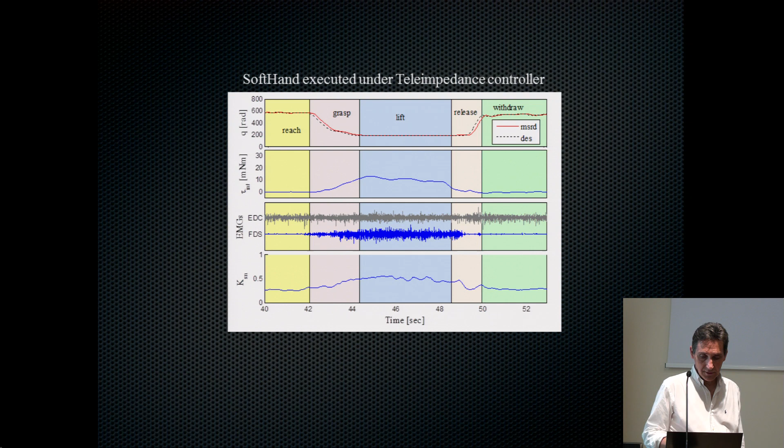Yeah, so you can see here how you can adapt. For instance, this ball here is much heavier than it looks like. It has metal inside, so it's half a kilo, I think. So typically you start with a soft grasp, you miss, and then you increase more your stiffness, and then you grab.

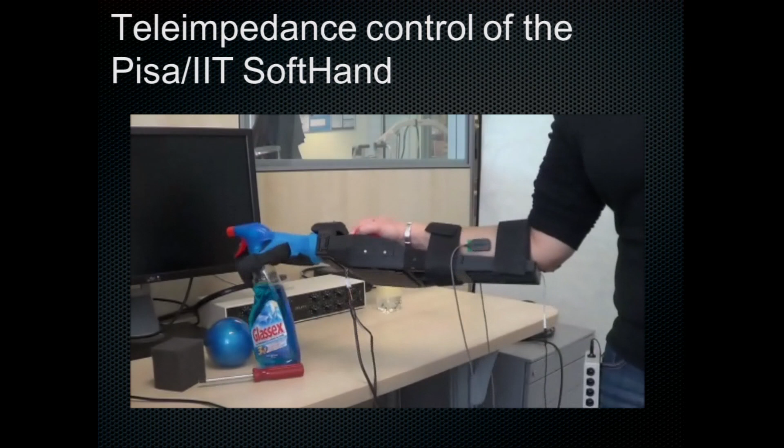The hand now is controlled through EMG. So through the 2 EMG signals, you get the position and force control and stiffness control of the hand. Instead of using the lever, I forgot to mention this, we can use EMGs. So you control the hand without moving your hand, basically by controlling the muscles.

And then you can also try and give feedback to the humans. The control of the hand is, when you see the hand, very intuitive. As I said before, this teleimpedance works magically well. But the problem is when you don't see the hand.

So if you are under the table and don't see the object, you cannot control the force, you don't know what the force is. If you see the hand, basically you have a visual capture that tells you much about the force. And actually there are videos later on where you can see you can be very accurate in force control when you see the hand. But if it is below the table or somewhere else, or in the dark, you don't see the hand. So what can you do? Then you need feedback to the humans.

Of course, we have a simple hand. The hand is very simple. Again, it's completely open source. You can download it, print it yourself, and it will cost you very little. It depends on how you cost your own time, but the parts are just a few thousand. It's not tens of thousands or hundreds of thousands like the shadow hand, for instance. It's an order of magnitude less, at least.

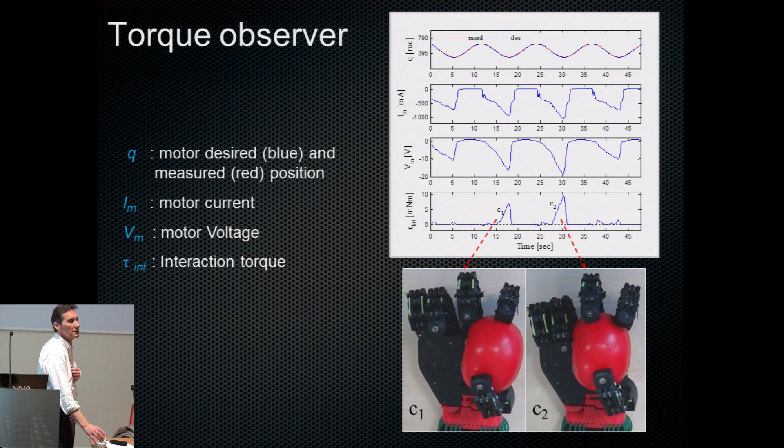Another useful thing is to measure the first contact, when the fingers get in touch - which finger has touched the object first. If you want to acquire a grasp without seeing, what's really important is to find that: the ring finger has touched, then I move until the thumb finger has touched, then I can start grasping, right? So you want to know when the contact starts, and also you want to know if there is slippage.

So both things turn out to be high-frequency signals, because a contact is a step, so it has a very strong high-frequency content, and slippage has some very high-frequency content because you have the texture that generates this high frequency. So it turns out that it's very useful to have accelerometers on the fingertips, not tactile sensors. We are not using tactile sensors - they are not as useful as accelerometers.

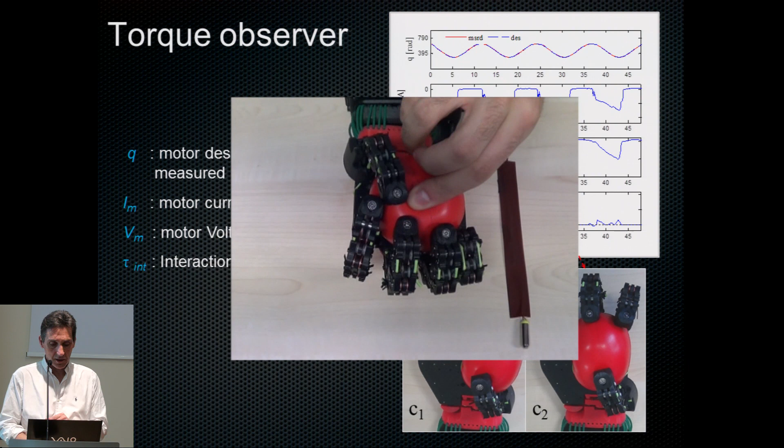And then replicate those accelerations with very high fidelity on the arm. So, accelerometers and voice coils, just like a stereo. You pick up vibrations from the hand and display them with a voice coil on the arm. And just like stereo, it works if it's hi-fi, if it's high fidelity. If you do a lousy transposition of the sensed acceleration to the display, it doesn't work. But if you do a good job, especially with analogic treatment of the signal, very accurate, then it works like magic. It's very convincing, like touching the object with your own hand. The quality of the hi-fi system between acceleration measurements and display is very important.

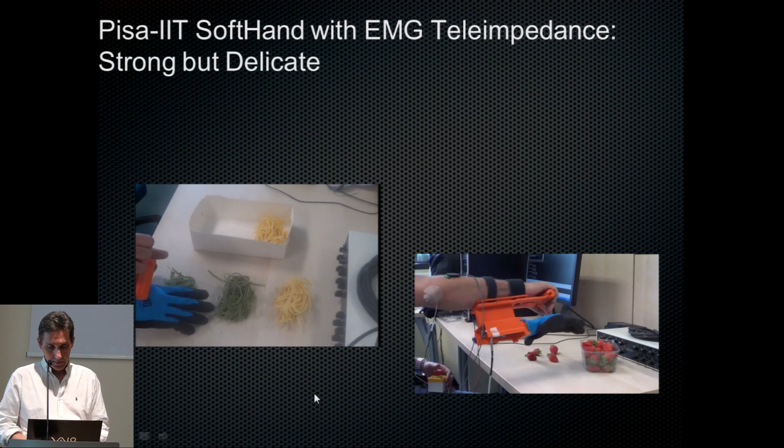So overall, you do these things, and you can do nice demos like these ones. You can grasp with the hand very accurately strawberries or dried noodles that are very fragile. So you can do this very fine manipulation with the hand.

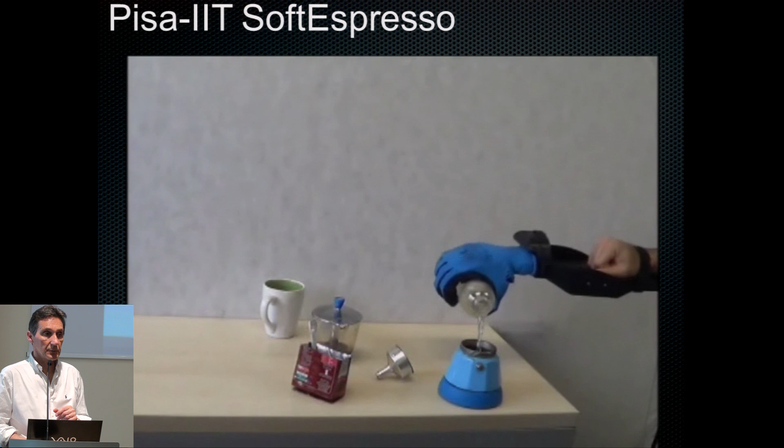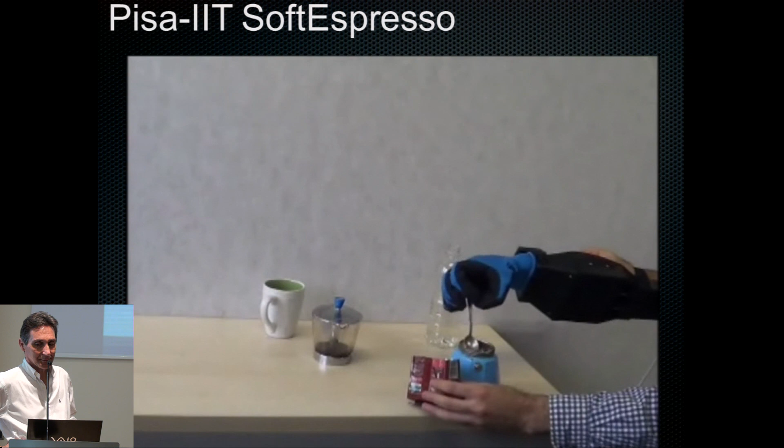This is a demo making coffee with the hand. This video was prepared by Arash Ajoudani, who's now a postdoc. He did a PhD, comes from Iran. He's an excellent student, but he's not as good at making coffee. You'll see I object - I mean, I'm Italian, so I am very particular about making coffee. He puts very little coffee, as you can see. It's not going to be good.

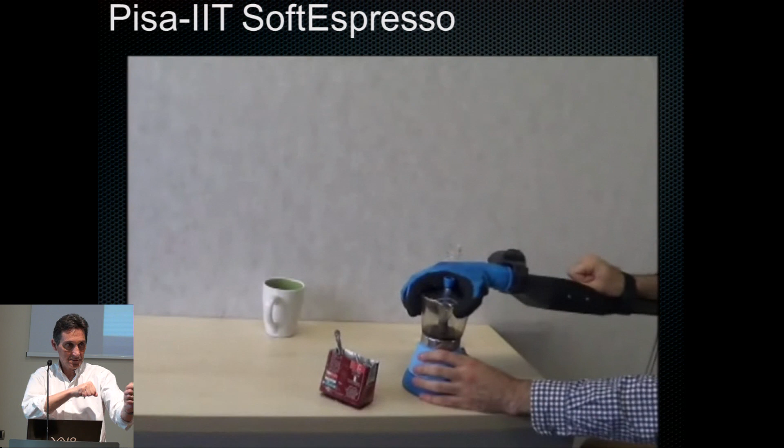Of course, you're using the true hand and not that one, mostly because the wrist is misplaced. So turning around is very inconvenient because it's not in the right position. So it would be like this, right? But if you had the hand in the right position, that would be okay.

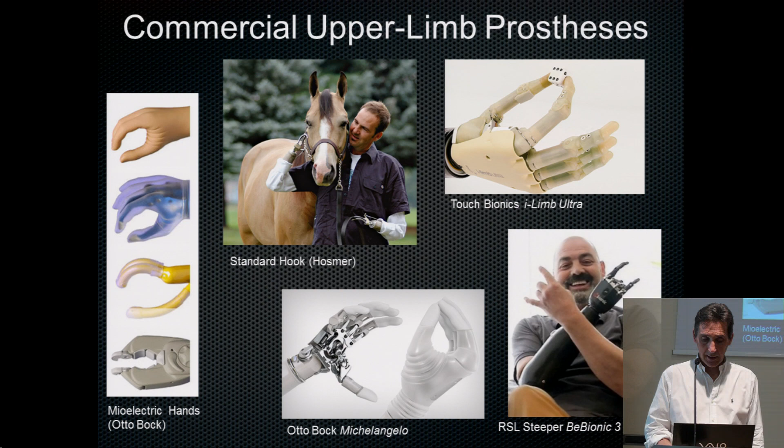So, classical prosthesis - here you see a few tasks, like taking a glass out of a pile of plastic glasses, not easy. You have to control the force. These standard prostheses are rigid, fragile, much more costly. Some of them are very simple, still rigid. It's interesting that amputees tend to prefer the simplest prostheses to the most complex hands, because, of course, they're more robust.

Let me just finish with this. Pretty happy, satisfied.

Okay, so finally, bio-awareness means knowing biology and applying it to robotics, not copycatting, but moving from nature to an abstraction layer and then applying it to a different body. So trying to understand - maths, control, modeling are important. Embodied intelligence - there can be no mind without a body. Build a science of embodied intelligence, abstract the insight from nature in terms of mathematical models, and then apply this new theory.